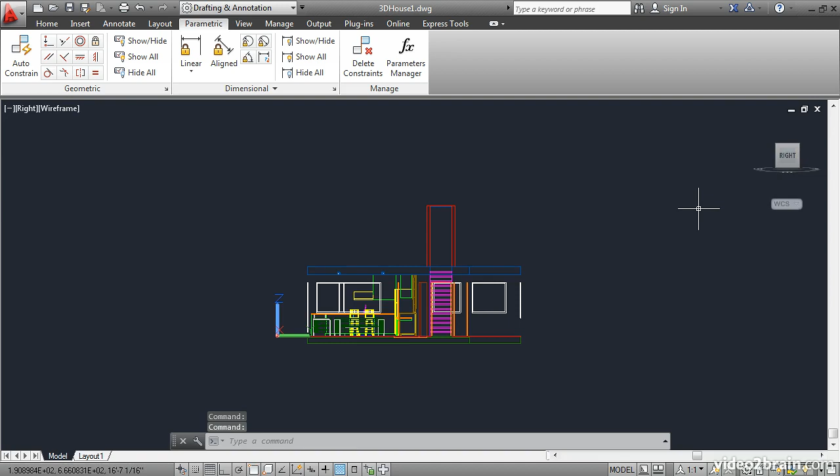Go to the right face, and you'll notice that there are arrows above each side here. The arrows allow you to rotate 90 degrees. Click on this upper arrow to switch back to the top view.

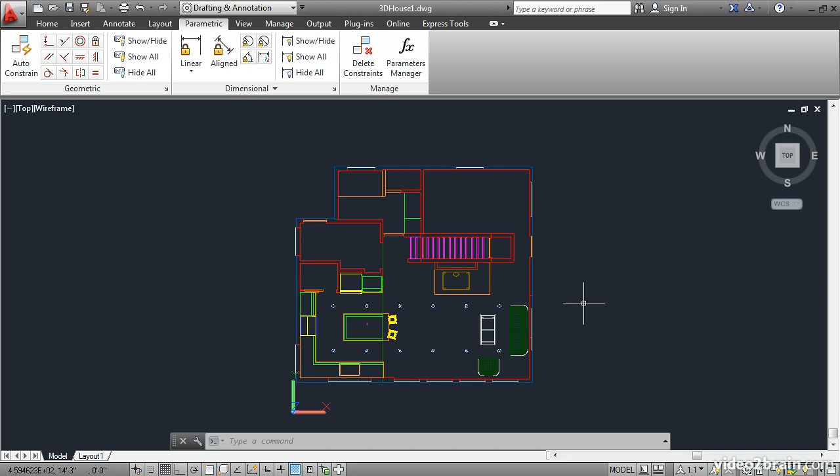When you're in an orthogonal view, you also have these arrows up here. You can use the arrows to rotate the model 90 degrees. So the view cube is a very intuitive way to orbit around a model. You can also orbit continuously by holding down the Shift key and dragging the mouse wheel. The view cube rotates to keep up with your orbiting.

In order to view the model from inside, it is necessary to create a camera. Type the command camera, and then the command line says specify camera location. Let's click it right on this sofa here.

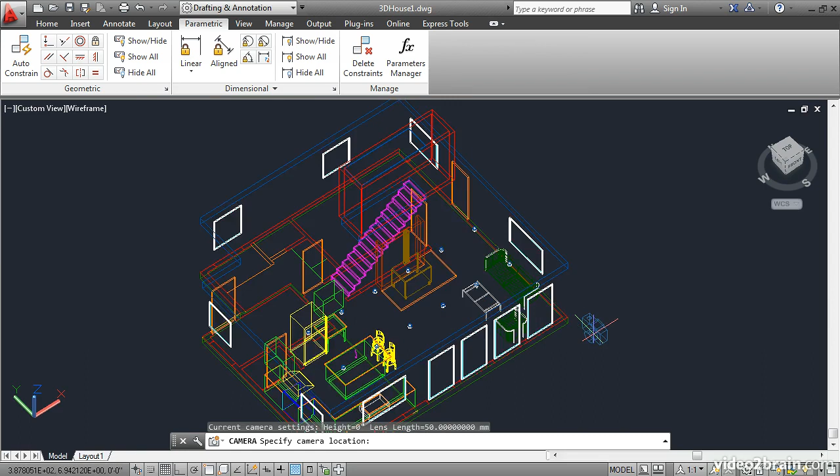The command line says specify target location. Click somewhere in the kitchen, and then press Enter. A camera object has been created here, right on the sofa.

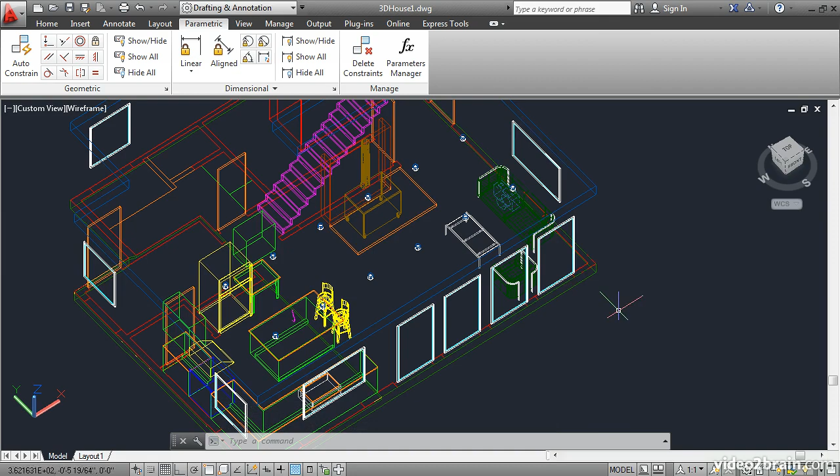However, it's on the ground plane, and you can see that by orbiting around. The next thing we need to do is move it up to eye level.

Type M for move, select the camera object, Enter. Select an arbitrary base point off to the side someplace, and then turn on Ortho on the status bar. This will allow you to move up in the Z direction. Look at the tooltip and move it up approximately 5 feet, which is eye level for most people.

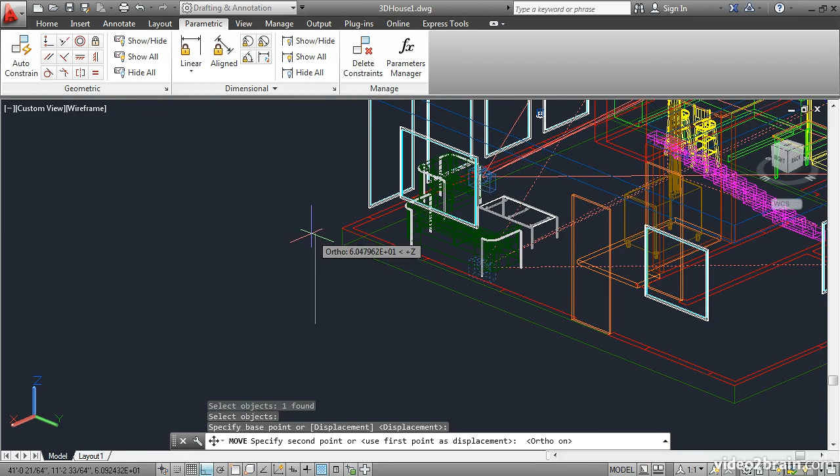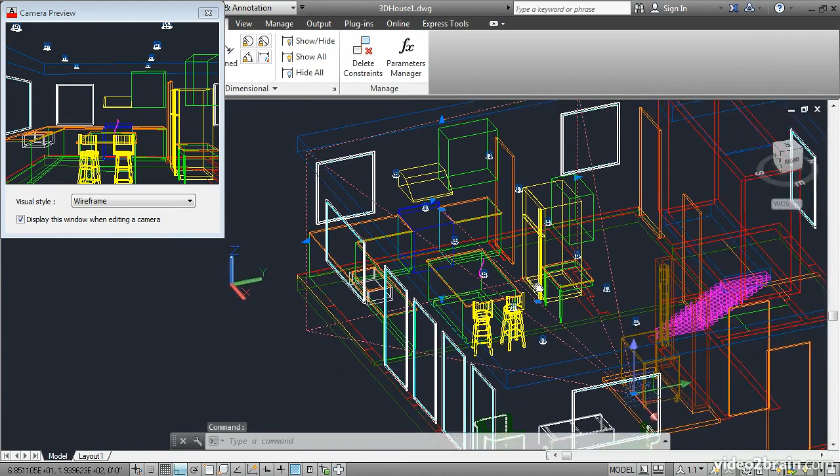Next, select the camera itself, and you'll see this camera preview, which shows you what it would look like if you were looking through the viewfinder of that camera. Hold down Shift and orbit the model so you can get a look at this picture plane, which is what we're seeing here in the preview.

The picture plane has grips. Click this grip to change the lens length or field of view. Expand it outward to create a wide-angle view of the space. This will allow us to see more of the interior.

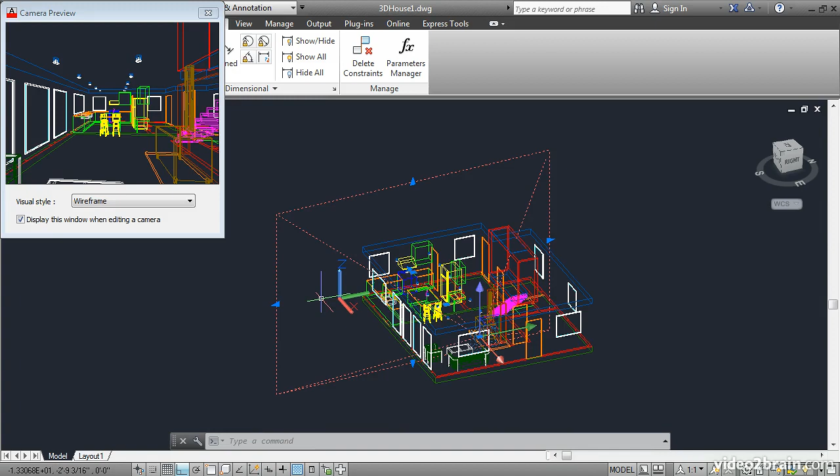Press Escape to deselect. Now, if you want to look through that camera, type V for View and press Enter. It's located right here. Double-click Camera 1 and click OK. Now we're looking through that camera.

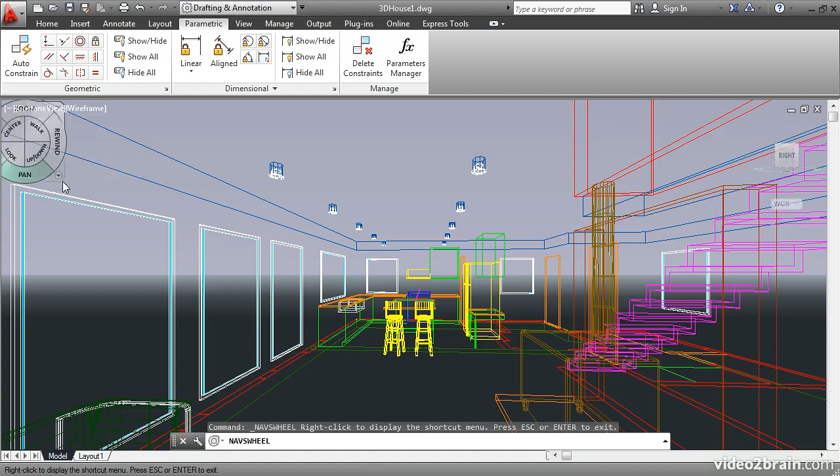If we want to move through the space, we can do so with a steering wheel. Go up to the Viewport Controls menu and choose Steering Wheels. The steering wheel is attached to the cursor, and it contains a number of navigation commands.

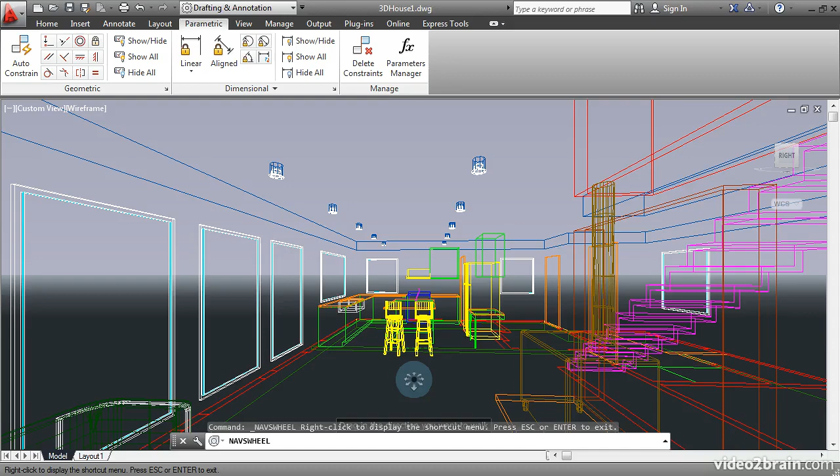For example, walk. Click and drag on this word walk, and what will happen is you'll see a circle appear in the lower center of the screen. If you move the cursor up relative to that point, you will start walking forward.

Try that again. Click and hold on walk on the steering wheel, and then drag the cursor to the right to rotate right. Drag it up to walk forward. Drag it left to rotate left.

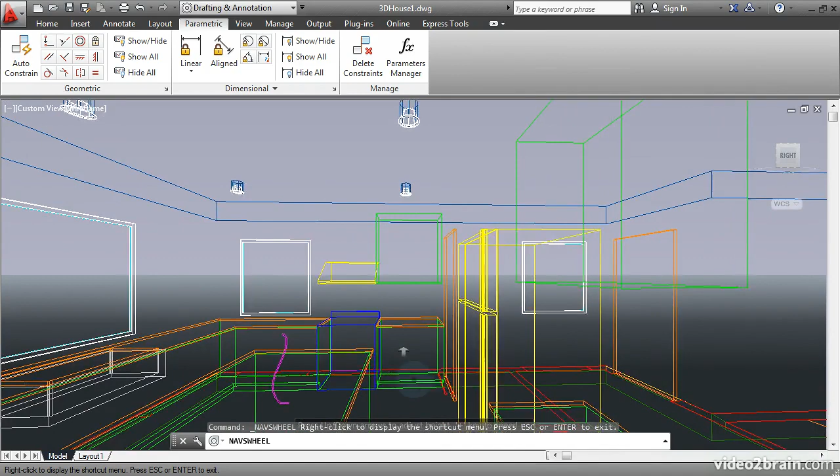See if you can walk in this area between the kitchen island and the refrigerator. When you come up here to the stove area, drag to the left. You can also back up by dragging down.

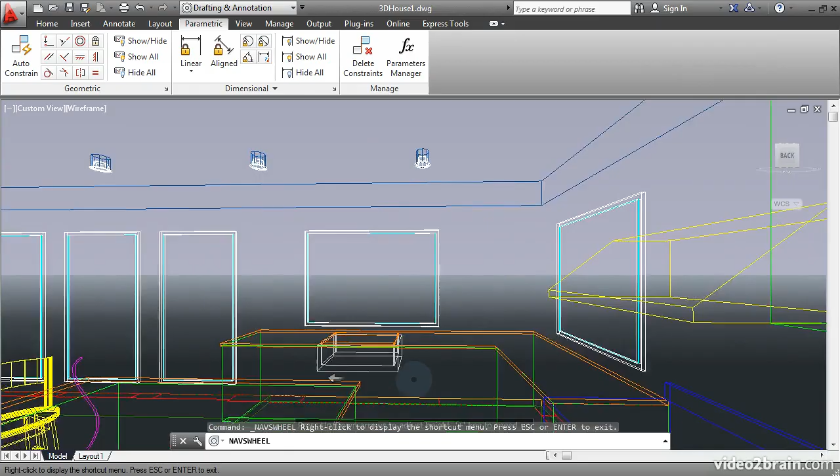Go ahead and navigate so that you can view the space from this corner of the kitchen. I'll use pan to drag over, like that. You can also use up-down if you want to move the camera target vector up or down.

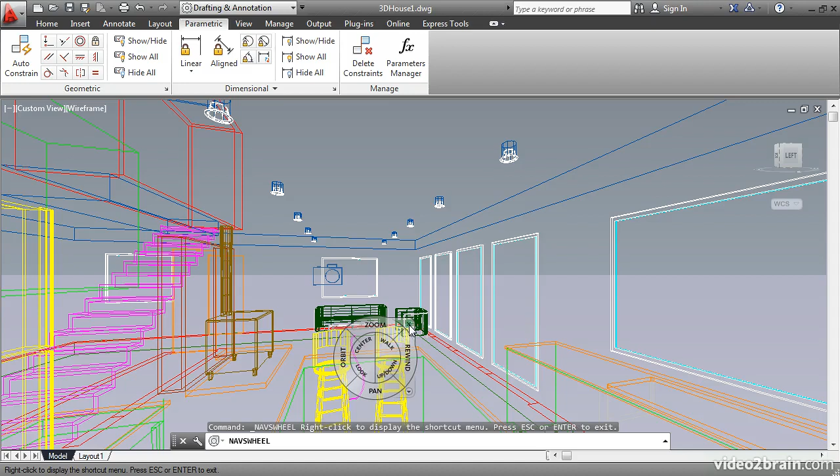When you're done with the steering wheel, close it by clicking this X in the corner. Then type V-Enter for View and create a new view. Click New and type View from Kitchen. OK and OK.

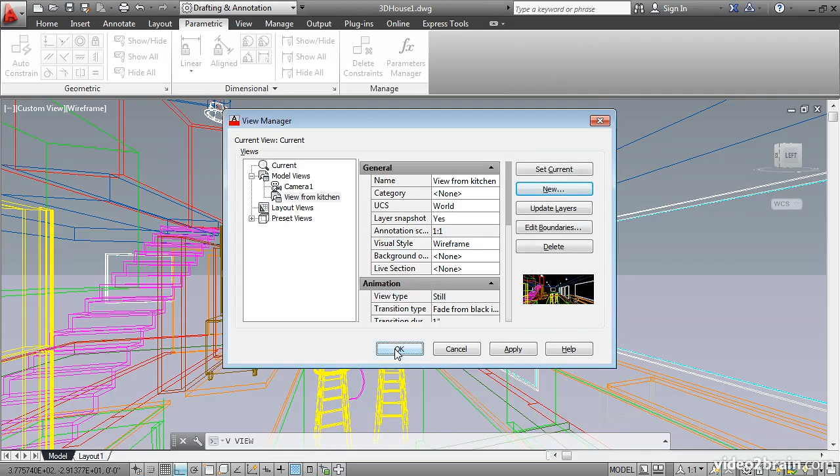Now let's use the view cube to switch back to an isometric viewpoint by clicking this corner piece. When we do that, we can see that there are now two cameras, here and here. We can easily look through one of those cameras by using the View command. So in this lesson, you've learned how to use the view cube and steering wheel controls to move around and through space. In addition, you learned how to place a camera and how to save named views.